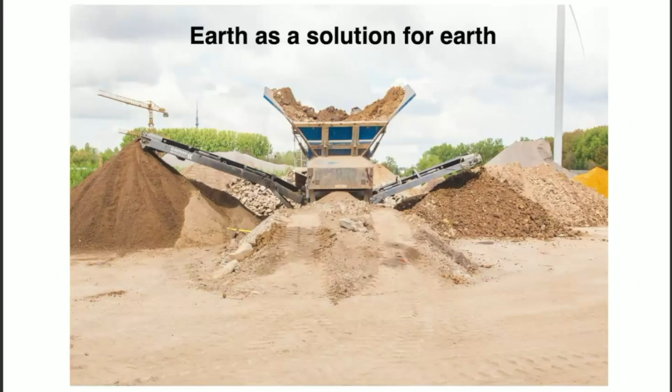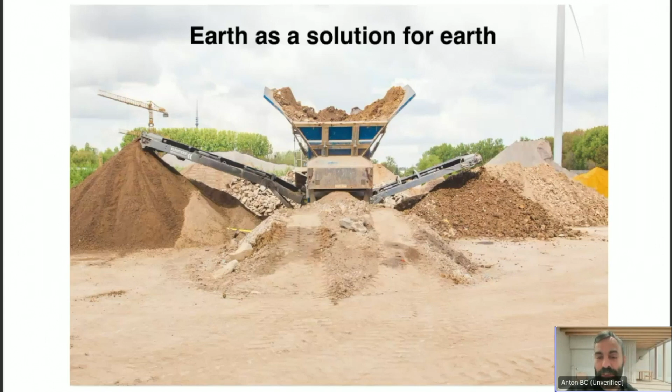So here it goes. For us, it's a very simple statement: Earth as a solution for Earth. Because the theme of the seminar is nature-based solutions, and actually Earth is one of the most basic nature-based solutions that we can find in building. But let me first sketch a bit the problem that you probably know. The building sector is one of the most polluting sectors in the world, probably the most polluting.

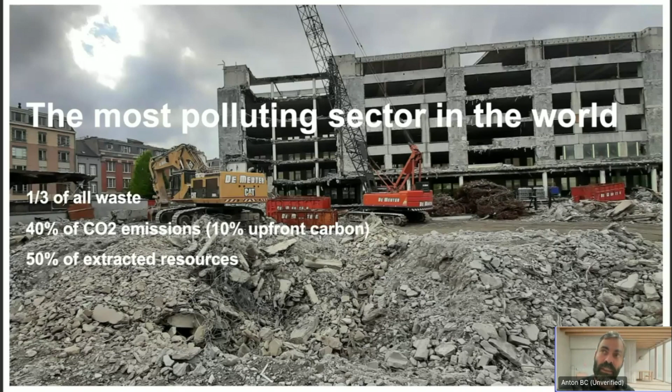This is a building here in Brussels that was demolished after only 30 years. And unfortunately, it still happens a lot in a lot of cities that all of these materials are not selectively dismantled, but just demolished. And so the building sector causes a third of all waste globally. It's also responsible for 40% of CO2 emissions, both heating and 10% upfront carbon. This upfront carbon is the CO2 emissions based on the production of these materials. And also important to mention that it's responsible for 50% of extracted resources. So it's a very heavy weight on the extraction, on the sourcing of materials.

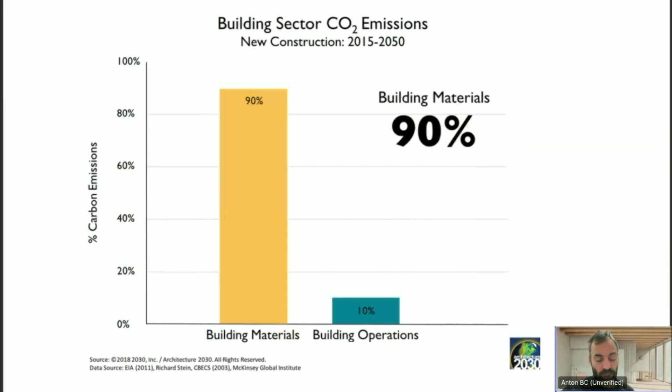And if you would put it a bit more boldly, you could say that, in fact, with the new EPB restrictions, one can now build a new house that is entirely reliant on renewable energy, which is great. But actually, all the emissions that we will cause with new buildings in Europe are tied to how you produce these materials and not necessarily to the building operations. So it's really a new challenge that we have to tackle, the CO2 emissions related to building materials itself. And there's still a lot of quick wins, a lot of low-hanging fruit.

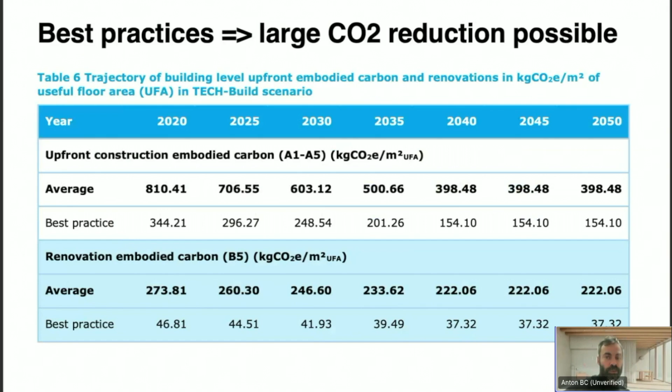This is a graphic from Rambøll Consultancy that you probably know better than I. In fact, a lot of people see that a square meter of building is approximately equivalent to 810 kilo of CO2 for an average building, and that the best practice could be 344. I think if you would start to calculate a number of bio-based elements, that could subtract even more from the best practice. But there's a huge reduction possible, and it's really something that we should be able to apply in the next 10 years in a massive way.

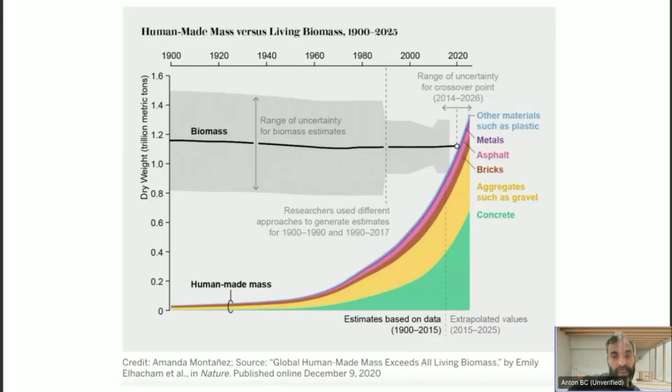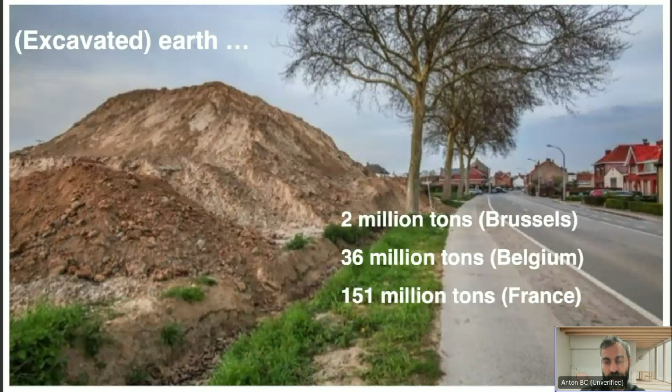And that's why we think that some of this waste, and excavated earth is considered as a waste, should actually be seen as a building material. And this is what we do with BC Materials. We transform excavated earth into building blocks, like the 20,000 blocks we made for an eco class in Antwerp. These 20,000 blocks were one of the first projects of both BC Architects and BC Materials, but there is so much excavated earth, both in Belgium and in other countries around us, that it's really a waste to not valorize it.

We work like this: when there's a construction going on, usually for a foundation, a parking, or a cave, there is a number of tons of earth that needs to be excavated.

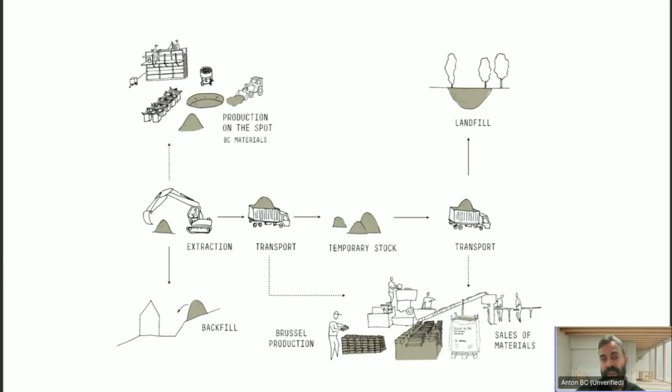Usually that transport goes to a temporary stock and then it becomes landfilled or dumped into mines or quarries. In Belgium, it sometimes even has to go to the Netherlands or Germany because we simply don't have the space anymore to take care of this excavated earth. So we kind of intervene in the transport by producing in Brussels blocks, plasters, rammed earth with this excavated earth instead of just casually throwing it away.

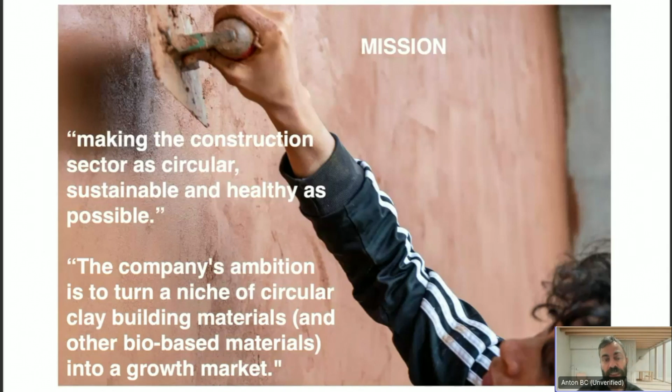And so our mission is really to make the construction sector as circular, sustainable as possible, and really specifically for us to turn this kind of niche of earth-based materials into something that is mainstream and at the standard, and that can really grow for a lot of people.

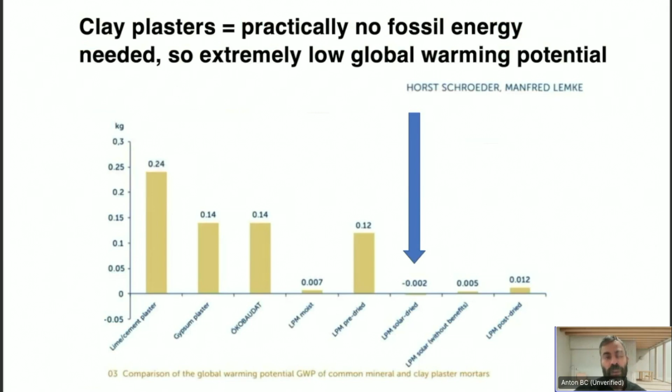This is an example of our earth-based plaster. We show it because it really has practically no CO2 impact. It's actually almost CO2 positive because you have a lot less transport. You avoid transport of excavated earth, for example. And it's not just ecology, but it's also quality, I think, for people who live inside these buildings, because it's better for air quality, better for your acoustics, better for the humidity.

And also, and this is an argument that in Belgium and a lot of Western Europe is becoming more important, is that it's mitigating temperature. A country like Belgium that is quite humid and quite cold in winter is becoming a bit more Mediterranean. So we see that we really have to prepare for warmer summers, sometimes with pernicious heat waves of more than 7 days where it's 30, 35 degrees. And really, people in Belgium are not used to this.

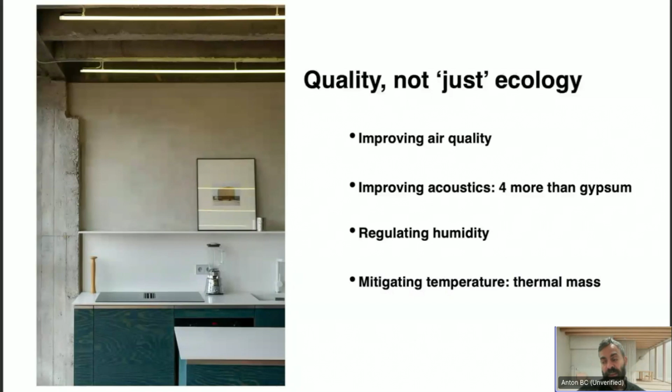So if we all start to install air conditioning, we'll just worsen the problem. So we really have to see how we can use nature as a kind of mentor. And I think earth-based materials automatically cool a space by 2 to 3 degrees, and it's really very helpful in these kind of apartments where you have heat waves and the negative consequences on our health.

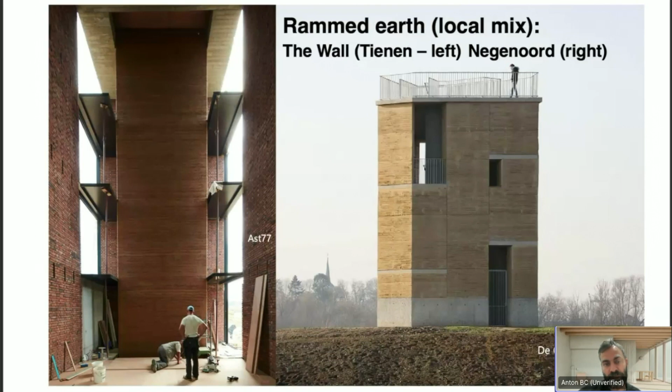You probably also know rammed earth. Rammed earth is a technique where you mix gravel, sand, and clay. It's a kind of concrete, but an ecological concrete where you mix it and you kind of ram it, and you can make quite high structures with this. This is an example of both the wall, one of the biggest rammed earth structures in the Benelux, and Negenoord, which is a belvedere, a watchtower that we made based on excavated earth of the site, and that we built together with the contractor, an architectural project by De Gouden Liniaal.

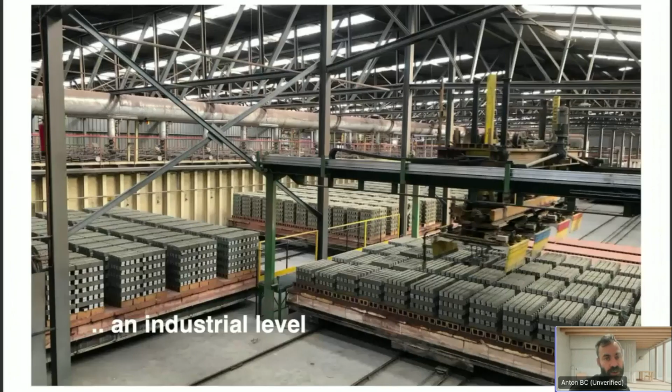But it's now possible to make these same blocks on an industrial level by using existing infrastructure of concrete producers or baked brick producers, inserting our formula into their scheme and not baking the blocks, but pressing them or vibro compacting them. In this way, you can accelerate your production rate from 1,500 blocks to 60,000, 80,000 blocks per day. And in this way, you can really decrease the price.

It's really one of the deal breakers in a lot of architectural projects that ecological materials are usually a bit more expensive than others. And I think this is a kind of industrial symbiosis way of decreasing the price and at the same time really being able to mainstream your material.

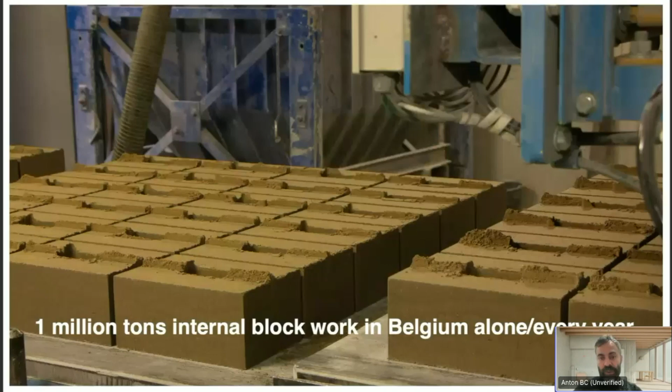Just to give you an idea, in Belgium alone, there's 1 million tons of internal block work. As you probably know, a compressed earth block, you cannot use it for outside blocks. But as you can see by this number, there's such a big demand for internal block work that could be filled up with earth blocks, that it's really something that you should press for.

And I think it's probably also possible in Scandinavia to go towards this industrial symbiosis where you use a kind of decarbonized way of producing something that is not necessarily baked and that can really do the job of any kind of block within the building.

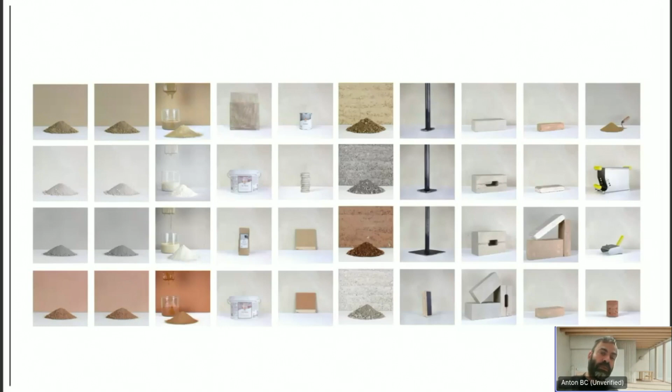We call this material range leem, from the Dutch word and also the German word, and it's a whole range of different materials: plasters, fine plasters, also netting, blocks, and rammed earth. And we've been growing a lot lately because we started in 2019 with this approach of making earth-based materials based on excavated earth. We started with about 50 tons, and now last year in 2023 we reached 2,000 tons.

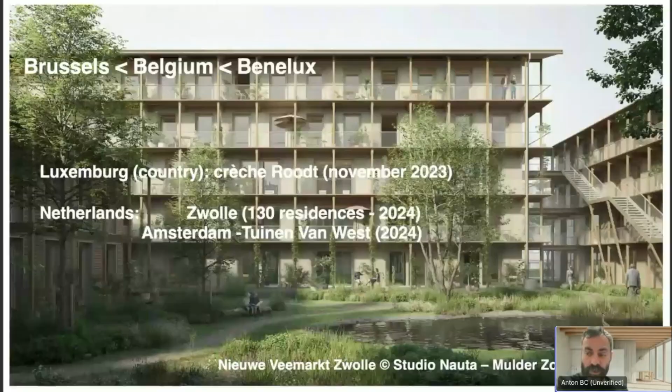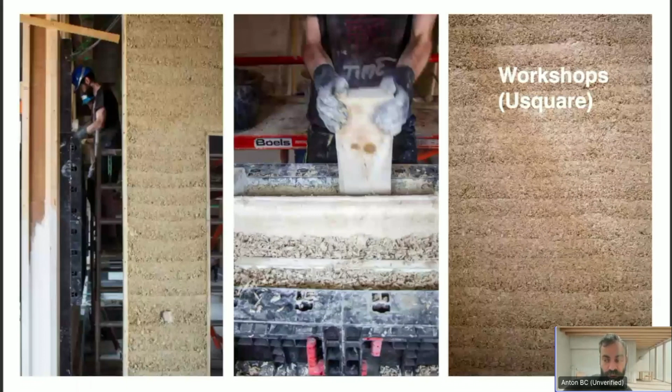We also have some new products in the pipeline. We recently launched a paint based on excavated earth. It's really shocking, I thought, to see what kind of rubbish and garbage classic paint producers put in their paint. There's a lot of microplastic, a lot of solvents, really chemical stuff that is bad for the health, kind of waste leftover of the chemical industry being put into paint. So we decided to make as healthy a paint as possible based on excavated earth. And the colors come from the clay that we use.

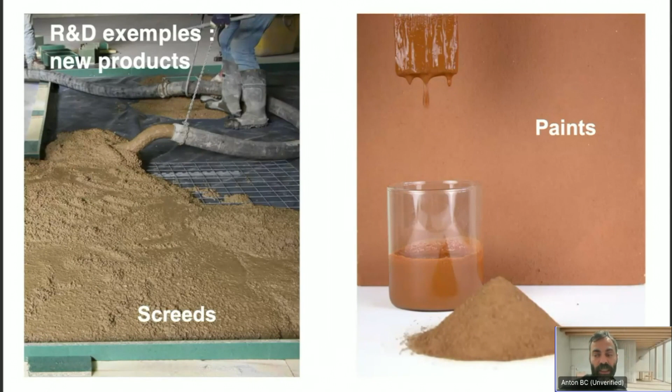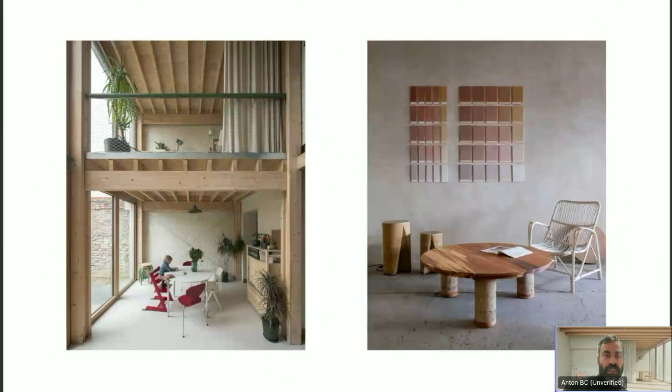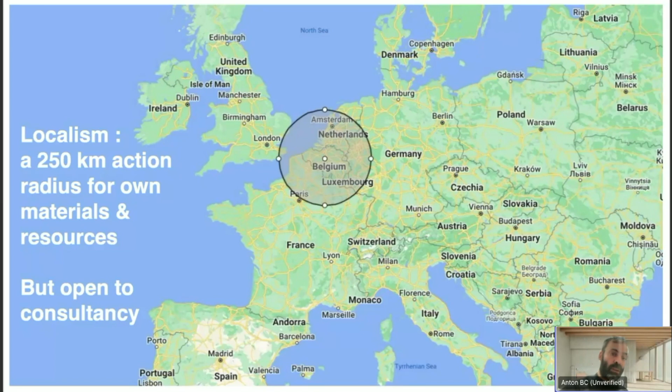I also wanted to mention we work mostly in the Benelux. We feel that it's better to stay within limits of 250 kilometers for resource use, because once you exceed this, you lose the ecological advantages that your material offers. We get a lot of questions, even from Australia and New York, for our samples and material, but we refuse these because it annuls all of the ecological advantages our materials would have. But we are always open to consultancy to see how we can make the earth building material world bigger in other countries, how we can exchange information, and how we can transform these materials together with partners in other regions.

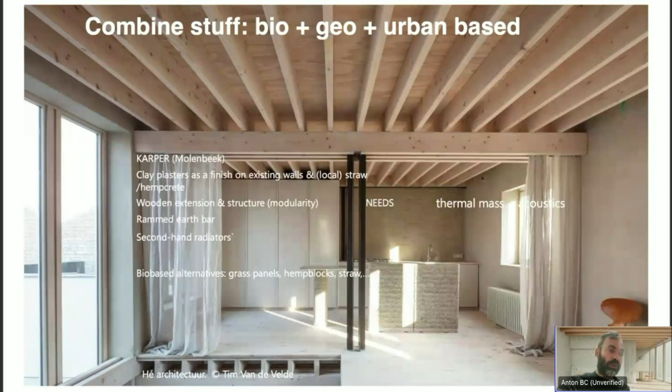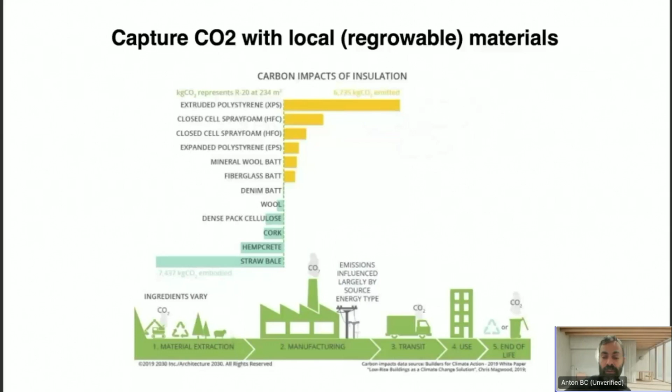And it's really very compatible with all earth-based materials, because you can plaster cork, you can plaster hempcrete and straw bales, combine wood structures with compressed earth blocks to create the mass that is necessary in the building. There's really a lot of stuff possible. And this is also a bit why we're moving towards a new direction in the upcoming years.

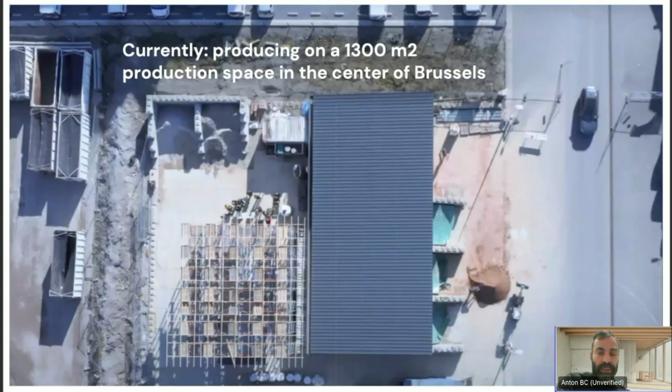Currently, we're producing on 1,300 square meter production space in the center of Brussels, not far from the center. And this is already great for us because, as I mentioned, we're seeing the growth, but we think that this combination of using both bio-based and geo-based and resourced urban-based materials is really a big idea that could really change the construction sector.

And that's why we're moving in the near future towards a different site, actually on the other side of our street. And we're doing this together on a bigger scale with our colleagues from BC Architects, Democo Group, who is a contractor that is focused on reused material like steel beams and certain insulation, Tournevie, Natura Mater, local Sonian Woodcoop, that is a local wood producer, and Ney + Partners WOW, who is a circular CLT reuser. Of most of the CLT that is produced, some of it, 7 to 25%, is waste and is usually transformed into pellets. And they want to start reusing these CLT leftovers.

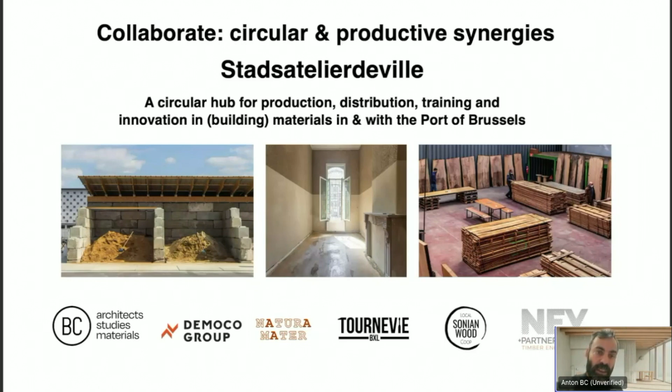And it's this combination of partners with which we are going to build an exemplary project for these materials, but also focused on mainstreaming the circular transition in the construction sector by acting on production, distribution, training, and innovation in these materials. The focus is obviously on the Green Deal, where we should have a Europe that is completely circular and CO2 neutral by 2050.

But we also like these values from the New European Bauhaus with inclusivity, beauty, and we think all of this is really possible if we let nature guide part of our architectural insights and design. And it's really smart to make it not only into something that is construction based, but also cultural based, because I think this new approach really taps into what young people want and what is precious, what is not wasteful.

And in the end, and I'm really eager to hear your thoughts about this, I think there's a lot of win-wins in this approach, because we're going to win both on health, on creating good jobs in the city, on collaborations between industries, fighting climate change, and really managing a more livable city and a livable future for a lot of us. And that's it for me.

I hope I didn't go too long over time, but I'm eager to hear your questions. It was excellent. Thank you. You had 1 minute left. Great. So maybe how should we do with questions now? We take it later. Still, will he be able to listen in? Should we take one question now? Yeah. Any question? Yeah, Rosa.